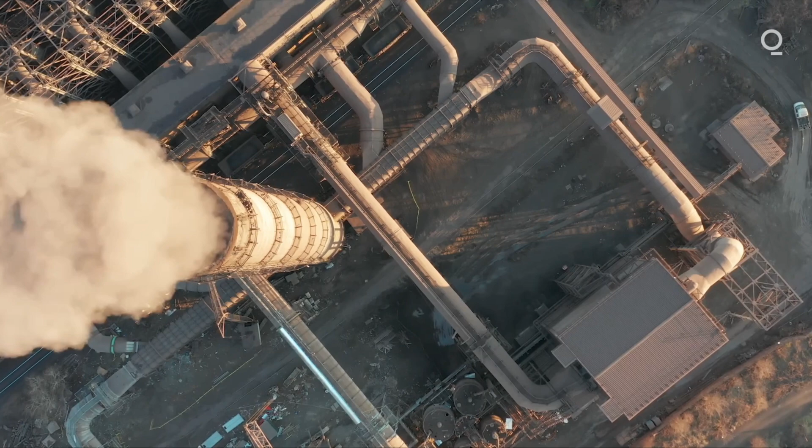Industrial pollution, particularly from carbon dioxide emissions, is a major contributor to climate change and environmental degradation. Power plants, especially coal-fired plants, are the largest industrial sources of CO2 emissions. Manufacturing and heavy industries such as steel, cement, and chemical production release significant amounts of CO2 through combustion and chemical processes. Oil and gas industries extract, refine, and process petroleum products, generating high levels of CO2.

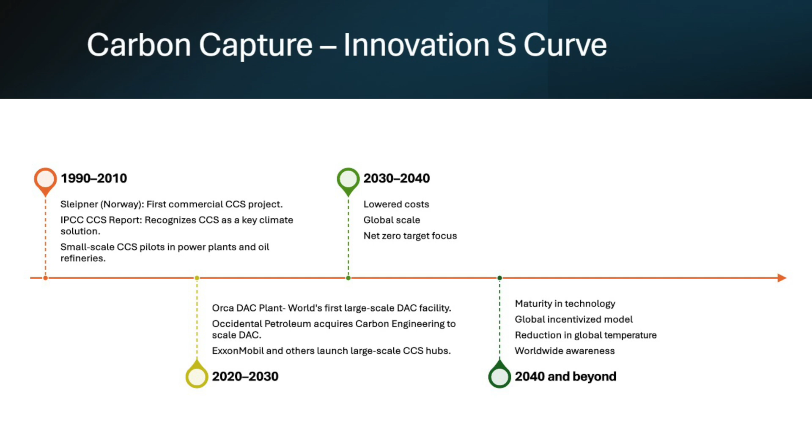Exploring the innovation journey, starting with 1990 to 2010, we saw the Sleipner project in Norway, the first commercial carbon capture and storage project, also known as CCS. During this period, the IPCC recognized CCS as a key climate solution.

2020 to 2030, the Orca DAC plant, the world's first large-scale direct air capture facility, became operational. 2030 to 2040, looking ahead, the focus is going to be on reducing costs, achieving global scalability, and aligning with net zero targets. By 2040, we expect to reach maturity in CCS.

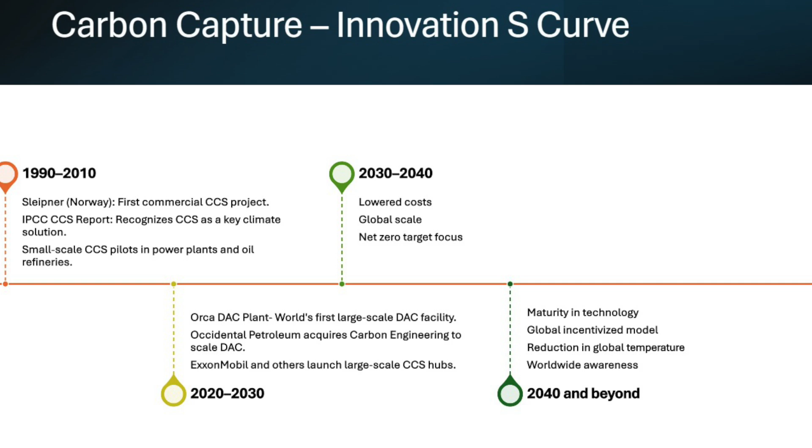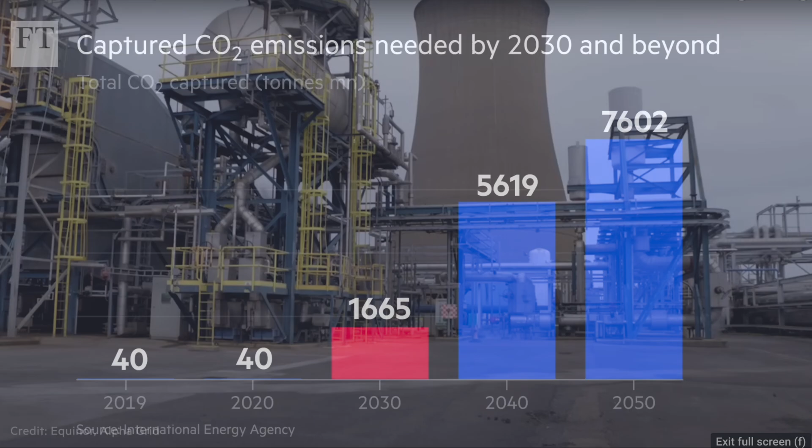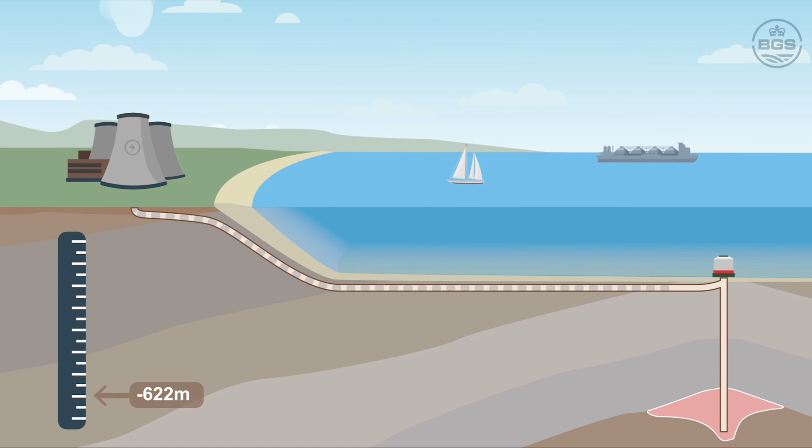Carbon capture works by trapping carbon dioxide emissions from industrial processes before they enter the atmosphere, reducing their impact on climate change. The process typically involves three main steps: capture, transport, and storage. Once captured, the CO2 is compressed and transported, often via pipelines, to a storage site. It is then injected approximately 800 meters deep underground into geological formations.

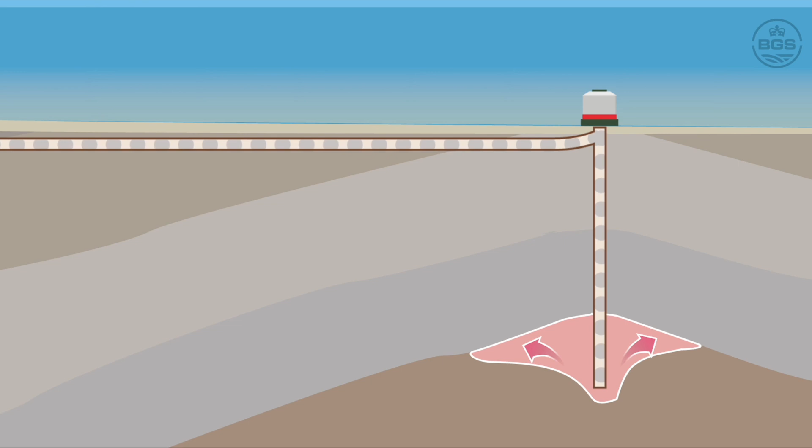Despite huge technological advancement in other fields, the big question is, do we have enough technology to remove CO2 from the atmosphere?

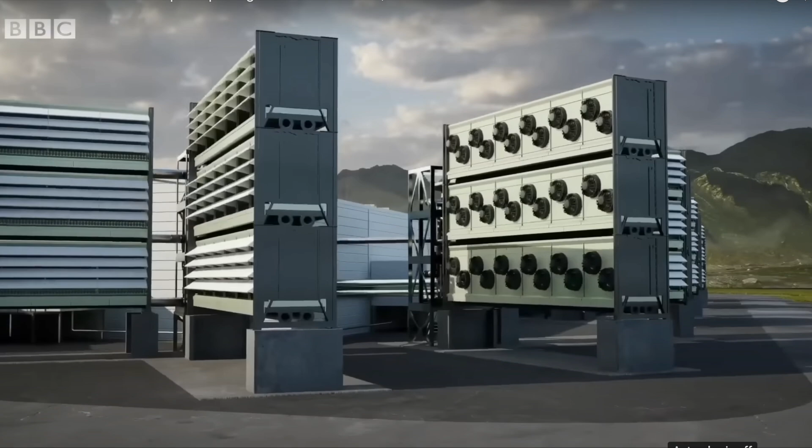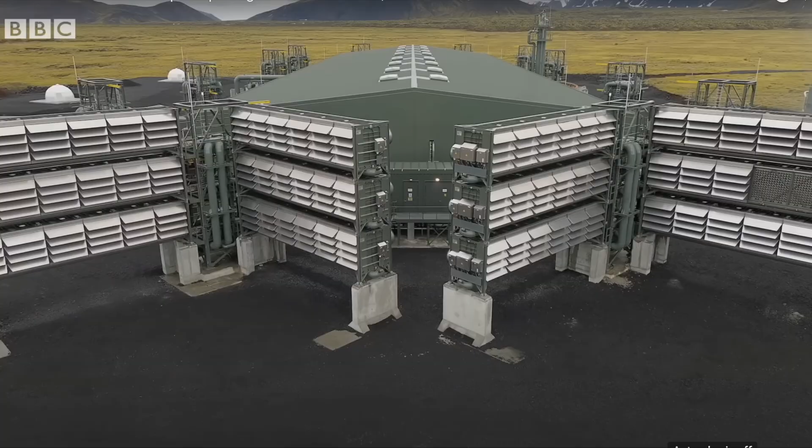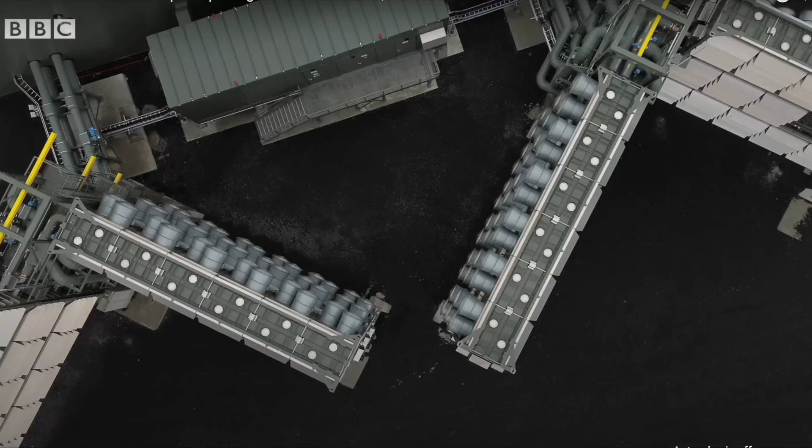The four major techniques used for removing carbon from the atmosphere are direct source carbon capture, direct air carbon capture, bioenergy carbon capture, and chemical weathering. However, in this video, we will only be discussing the first three.

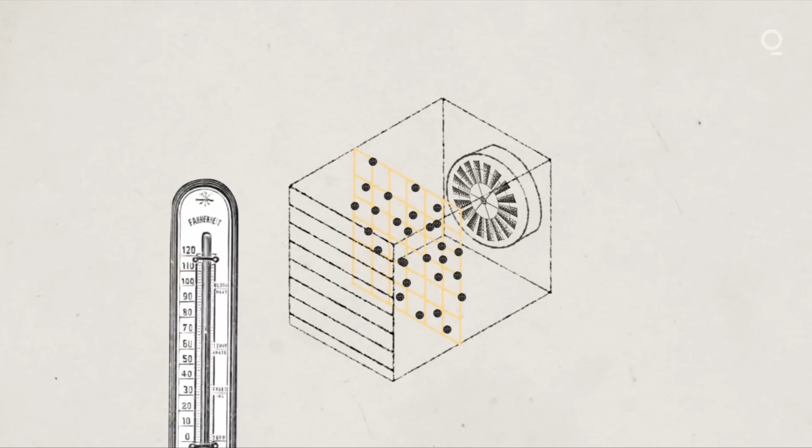Direct air carbon capture involves passing atmospheric air through special chambers. This special chamber is heated to about 100 degrees centigrade, where the captured carbon is then dissolved, mixed with water, and then forcefully injected into rocks.

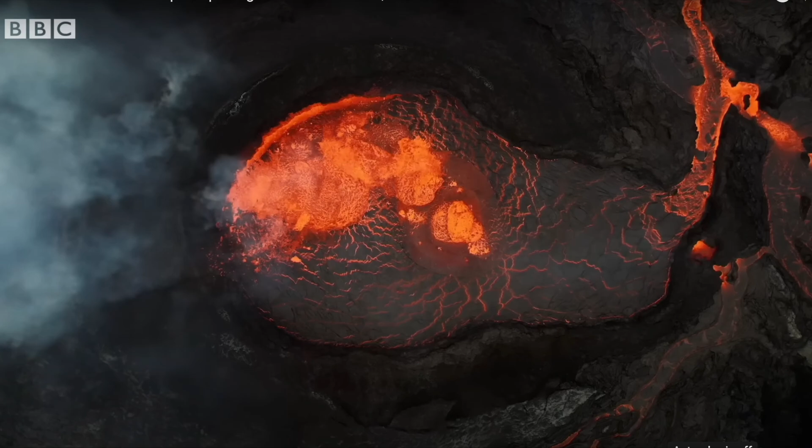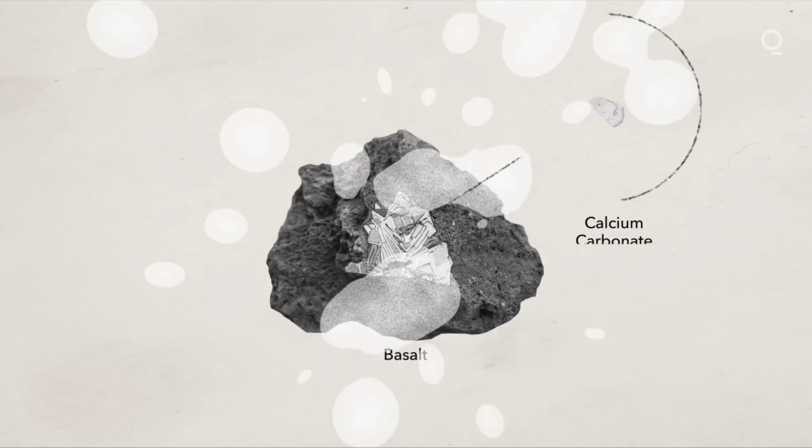Volcanic eruption activities lead to the chemical reaction of iron, magnesium, and calcium, resulting in basalt, which is a porous rock. The infusion of the CO2 into the basalt changes this to this.

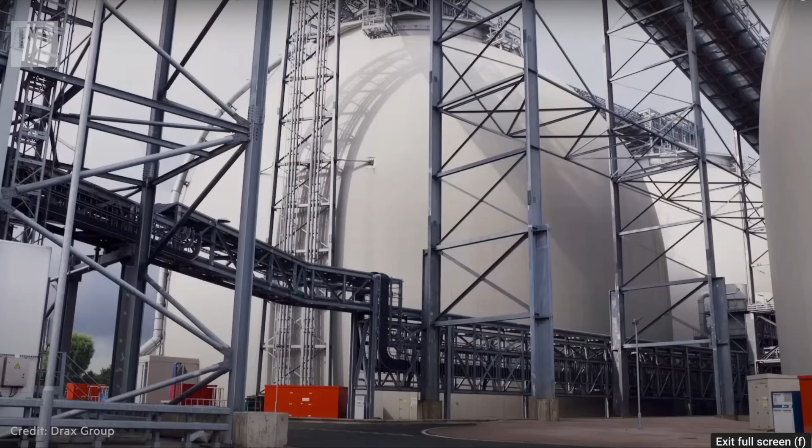The next method is bioenergy with carbon capture. This basically takes cognizance of the fact that plants store their captured carbon in their tissues, thereby making plants our natural method for capturing carbon from the atmosphere.

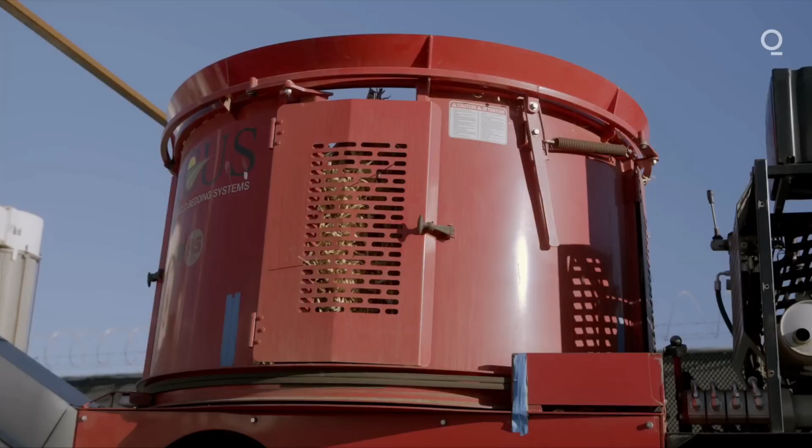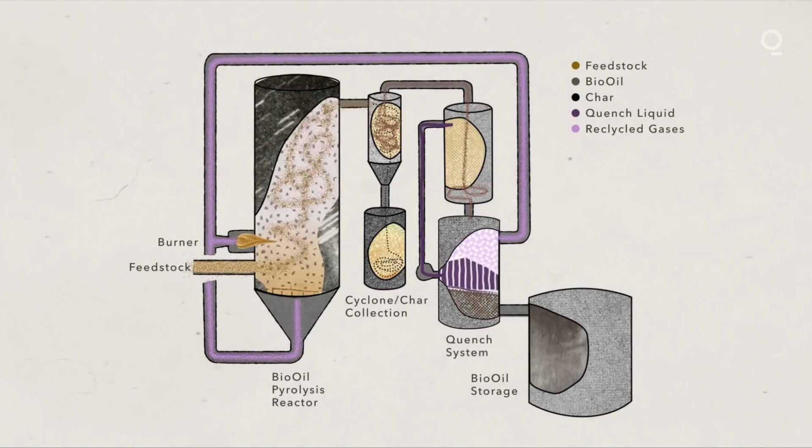The compressed plant tissues are put in a furnace where they are used to generate power and other byproducts. The captured carbon is then injected into rocks as already discussed.

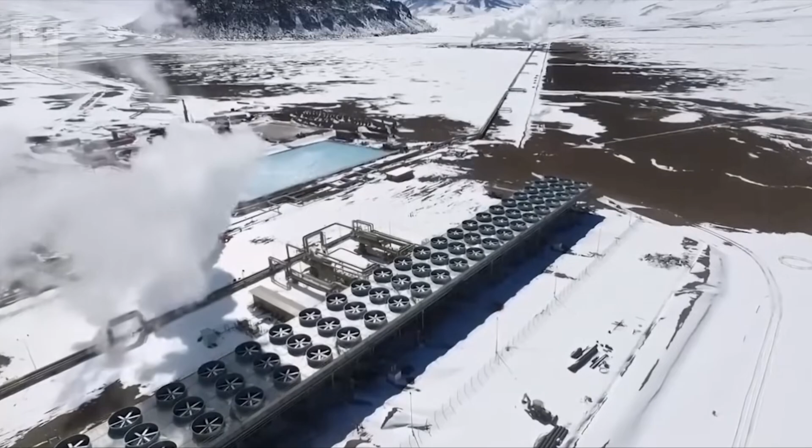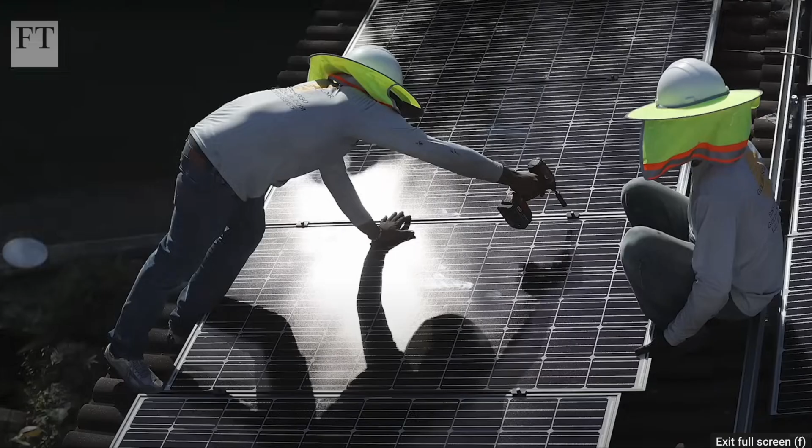The oil companies choose carbon capture, utilization, and storage technology because it makes their business viable. The oil companies are ignoring renewable sources of energy as it counters their core business. Captured CO2 can be refined and used in medical use, food and carbonated drinks, and synthetic and fuel production.

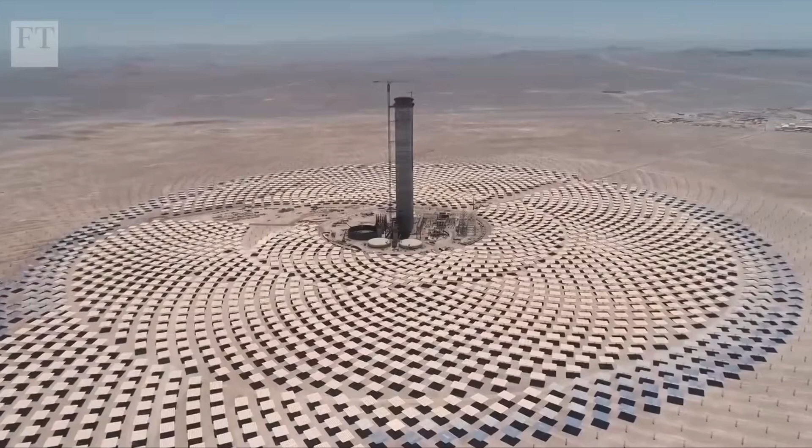It will take technological improvements, engineering solutions, and intentional efforts so that by the end of the decade, the cost of capturing CO2 can be further reduced from $1,000 per ton to about $300 per ton.

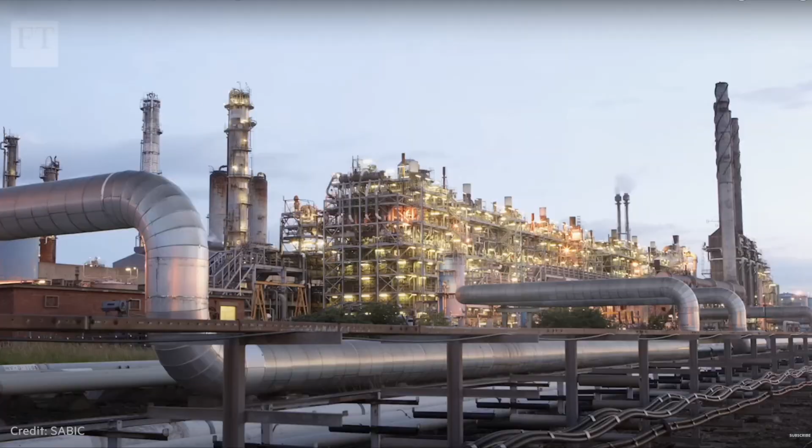Carbon capture utilization technologies will be among the many approaches that will reverse the damage and start the climate healing process.